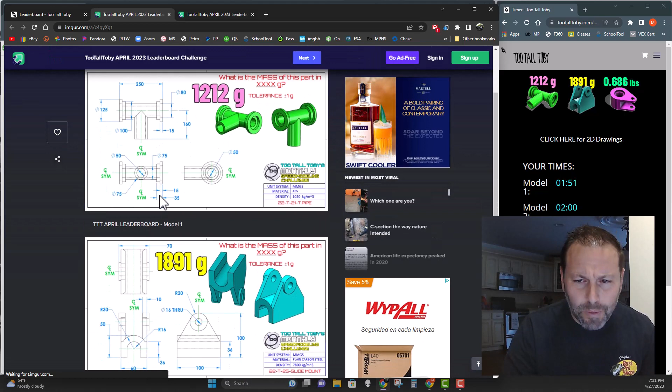So you're going to want to go to tootalltoby.com, go to leaderboard, and you'll see the parts right there. When you click on them, it brings you to his Imgur, where it has all of his parts. He gives you what they should weigh, an allowance within it, and the material and the density. Once you have all of that, you can go back to his leaderboard and hit compete. It brings up the clock, and basically you use screen capture or screen record for everything all at once.

I ran across this on my YouTube feed a couple of weeks ago and decided, why not, give it a shot. I also have my students doing this too, so within the next couple of days I'm hoping to see some real kick-ass times on here.

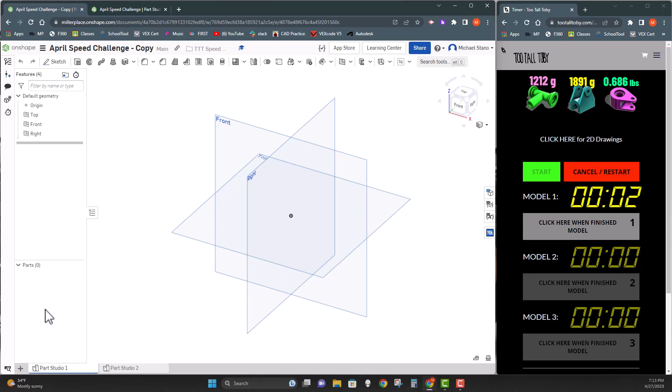So anyway, without further ado, I'm going to run you through it. So what we're going to do here is create a part studio, and from there I use Shift S to create a new sketch, bring it in on the front, and I'm just going to use a series of lines and draw in basically a shape that I'm going to revolve.

So it's just like a little flanged part. As you run through, just keep making your way around. I tried a couple different ways using rectangles to do this. Ultimately, I ended up with this.

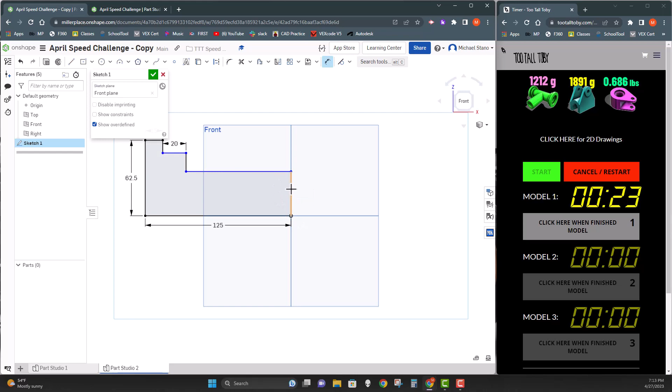Hit Shift W after you do the dimensions, and that will allow you to revolve this feature. To save a little time, I don't hit enter, I just go right into Shift W, click, set my axis, good to go.

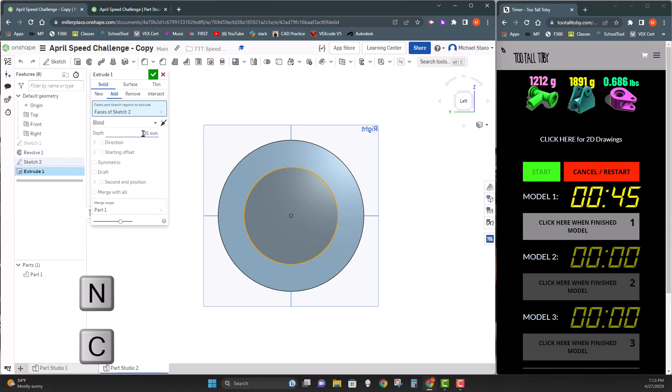Then what I'm going to do is Shift S again, N on the keyboard, C on the keyboard to basically bring this in, Shift E to extrude in 15 millimeters, and now I'm going to mirror this. No quick key for mirroring, hit S on the keyboard, add it to your preferences, mirror the part about its center line or axis, whatever it might be. Then Shift S, bring out a circle and extrude that 160 millimeters, and it brings that in.

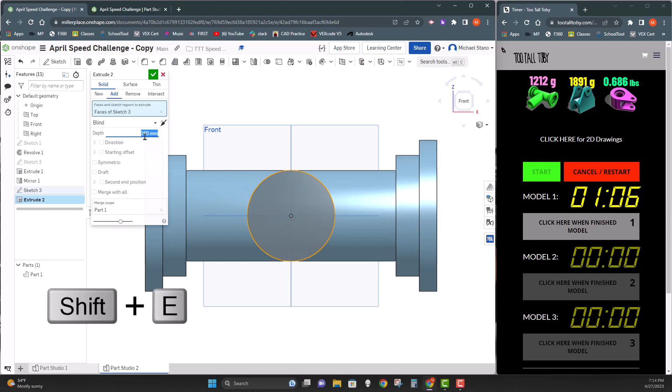Then I'm going to create a sketch on the end of that circle, extrude that back in 160 millimeters, or remove that material, what I'm going to do right about here. Shift E, remove 160, and it brings it right back on in. And do the same on the sides, except here I'm going to do a through all remove of that material.

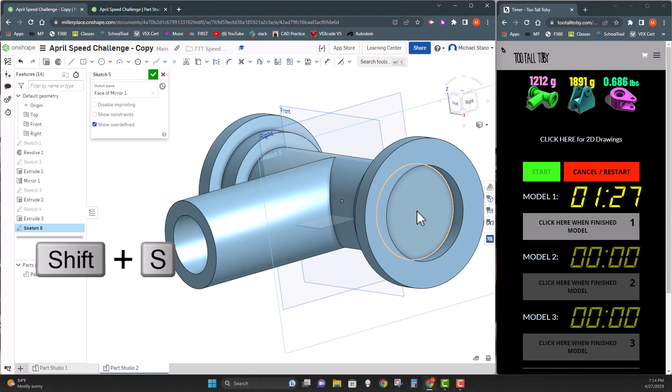Here we go, C again for that center point circle, and let's remove that, through all, check mark, done. Assign a material. I did make a custom library for this where it was just these three materials, so I can click them quicker. There is a way to get these materials quicker, I don't know how, whatever. I did it in 1:51. Going on to my second part.

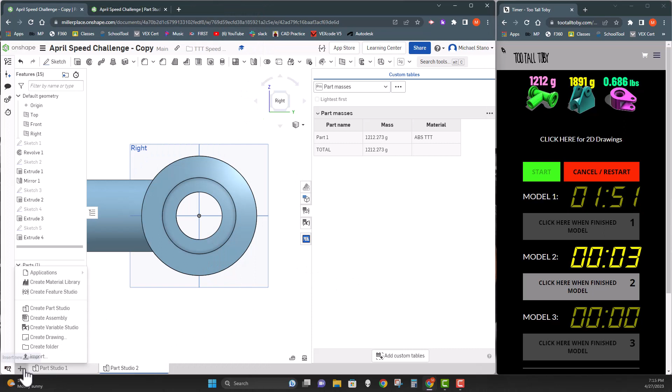Bring it on in, Shift S again, saves definitely a lot of time than clicking all the way up on the top. Gonna make a rectangle, dimension it to 60 by 36.

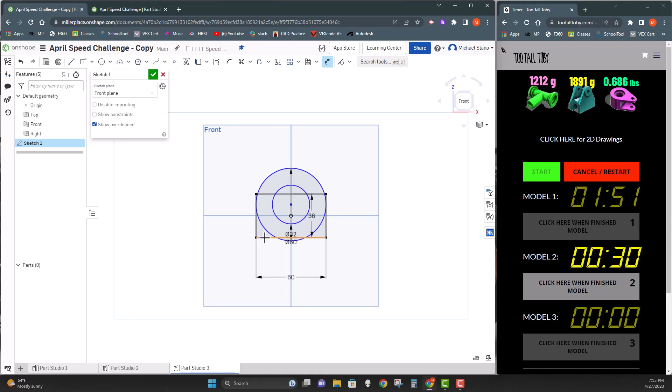Two circles then are going to be located midway through here, 60 and 30 or 40, I believe. 30 is this other through all, 32. And then what I'm going to do is I'm just going to dimension this up to the top for the 50 millimeters, and I'll probably just go in and do two lines that are tangent coming down.

After that, I'm going to do Shift E to extrude this part 100 millimeters after I get these two tangent lines in.

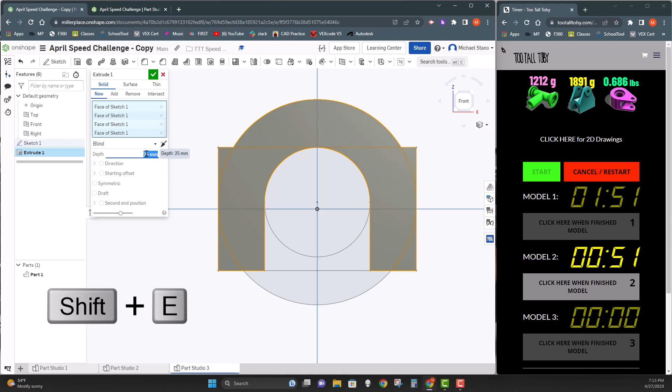Okay, deselect that one little spot, 100 millimeters, hit enter, Shift S, N brings it into view. Use or hit U on the keyboard to project geometry.

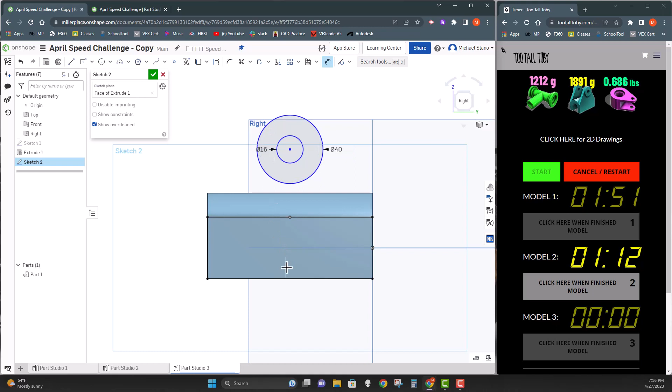Then I'm going to do two circles here, 16 and 32 if I remember off the top of my head, or 40. Two lines down tangent. When I dimension up, that is 100 millimeters. Now when you do the lines down, click like that, hit T on the keyboard, and that will give you the tangent constraint, L for line.

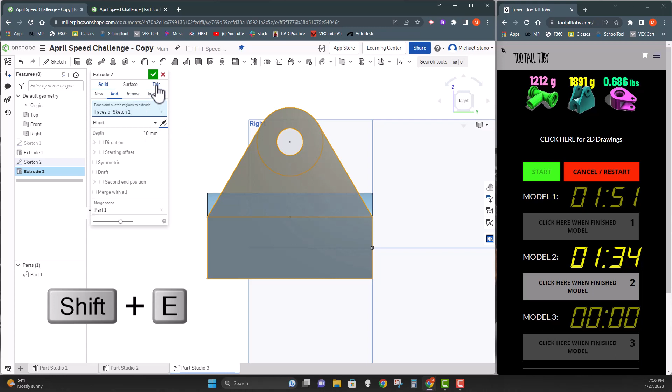Now when I do this, Shift E, change the direction of the extrusion, 10 millimeters. Then I'm going to hit Shift H, that shows all the sketch geometry, so I don't have to do anything again, and I can extrude that 5 millimeters.

Mirror this part on itself around that mid plane and assign that material as well.

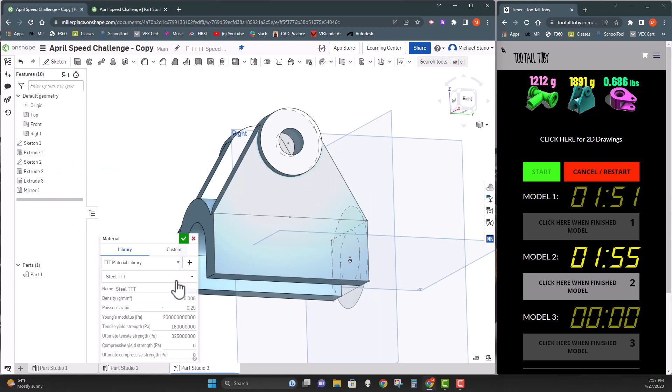There's this guy, Airwick. I don't know what he did, but he did something to make sure that all of his parts were the right material. One trick I did learn from him is to change the workspace units, instead of doing that, open up another tab and have it ready to go with the right workspace units. So when you create your part...

Now for this third one, basically I create the outer circle at 2.5, it should be. I go back and change it when I notice that the size is off. Lost a couple of seconds there.

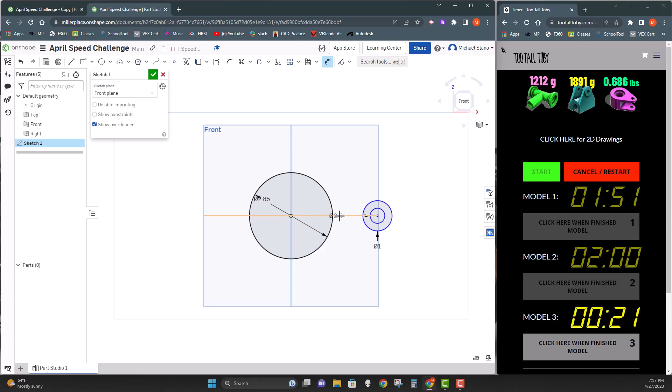That's fine. Two lines coming off of here are going to be tangent as well after you get that dimension of 2 inches from the center points. There we go, some tangent lines.

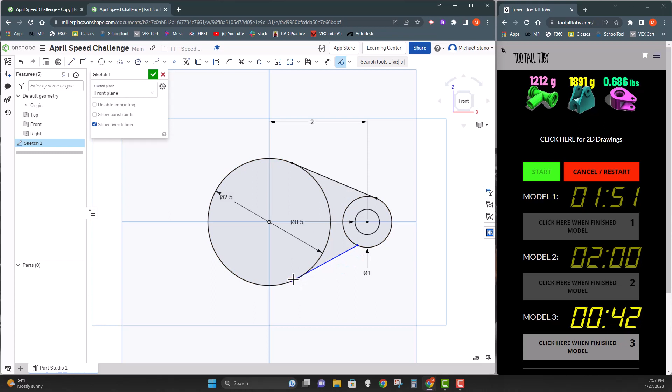It's like agony right now. Following this should be a little bit quicker. And I'm going to do Shift E, extrude this 1.8 inches.

Once extruded there, we're going to create a sketch on that plane that runs through it. Just going to make a center point. I'm going to project the geometry of the top line. Kind of stumbled there a little bit. Got it. And I'll make that rectangle.

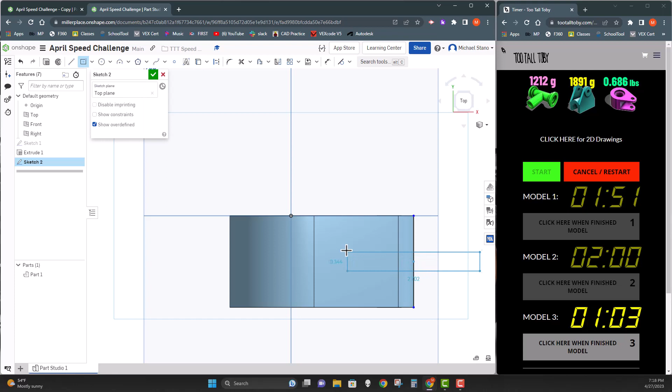I dimension it 1.75 from there to the bottom, and then 0.25 inches from the left and right side. At this point, I stumbled a couple of times even too with the dimensions, which was super annoying. Probably lost about 2 to 3 seconds on that.

I think in a perfect run, I could probably break 5 minutes and 45 seconds. 5:55, I'll take. You can see here, same thing, fumbling with that dimension. There's got to be an easier way.

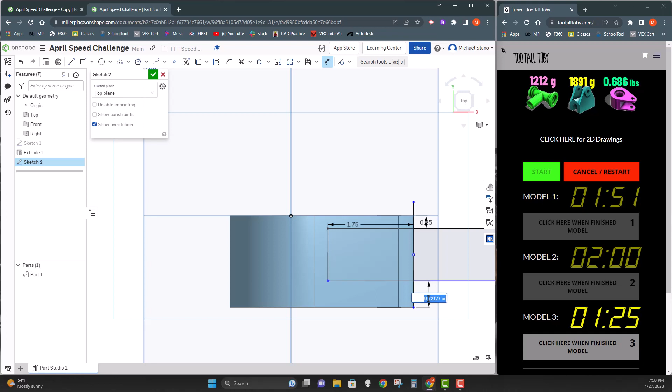I think any way that you put in the least amount of dimensions possible. I'm going to do an extrude here, symmetrically removing all, or through all. Then I come in and do 2 quick fillets at 0.1 inch.

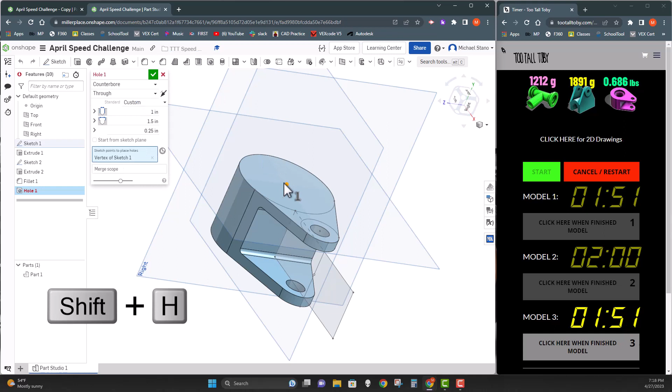I had them set up ahead of time, as well as Shift H, show the sketch, through the hole, right on through, which was done previously, so I don't have to put anything in. Assign a material of aluminum, if I can get to it.

And there are my parts, all done. I got a total time of 5 minutes and 55 seconds. So there you have it. There's my speed run of the 3 parts by Too Tall Toby. As you can see here, I'm in 7th place at 5:55.

I'll take it. I feel like I was a little bit quicker, I don't know. I think someone jumped in ahead of me because I thought I was at 6. Whatever, I don't really care, I'll take 7th. I'm sure I'll drop down a little bit more. That's pretty cool. I'm hoping to see some of my students up there in the top 10 as well, so we'll see what happens with that.

I think I'll be doing this every month and definitely taking a look at other people's Onshape videos to see what tricks they have. I think it's definitely a great way to learn Onshape or any 3D modeling software. It really gets you to kind of like hone in a lot of skills.